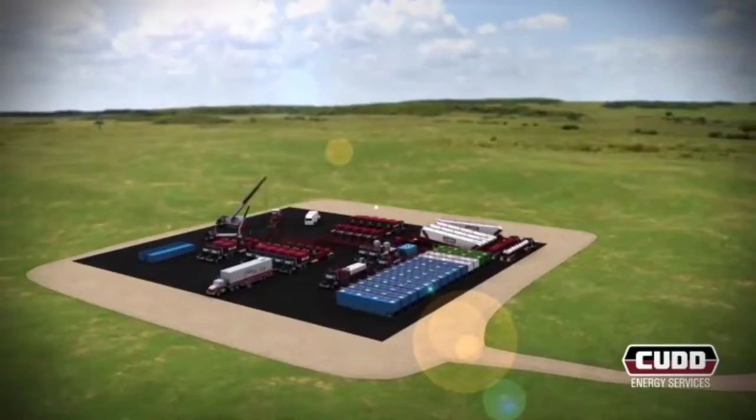Cudd Energy Services provides a broad range of specialized oil field completion services to energy companies engaged in the exploration and production of oil and natural gas. On today's well sites, we provide experienced personnel combined with engineered solutions to deliver an efficient completion solution.

Cudd Energy Services provides today's most modern equipment in order to prepare the well for the hydraulic fracturing process. Our fracturing equipment is engineered to the industry's highest standards with safety and reliability at the heart of the design. Our engineers evaluate existing well conditions to formulate an efficient and proven well plan for the customer.

Prior to any equipment arriving on location, Cudd's field representative performs a detailed site evaluation. Containment barriers and berms are constructed to preserve and protect the environment. This assessment ensures the safe and optimal setup of the water storage, proppant storage, coiled tubing, wireline, and pressure pumping equipment used for the completion process.

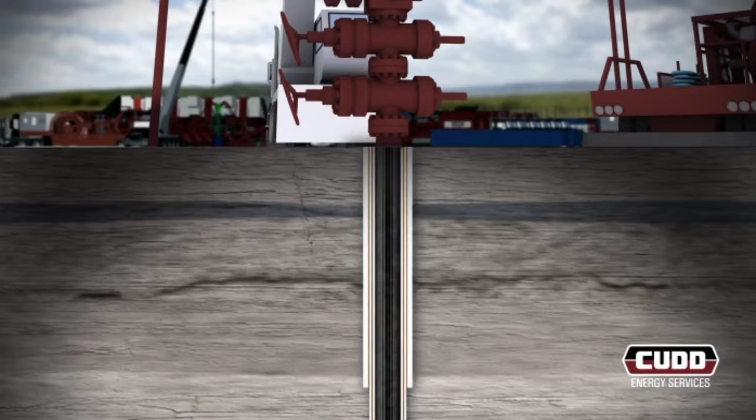After the well has been drilled, cased, and cemented, the completion phase begins. Hydraulic fracturing is an essential part of successful production in today's unconventional shale formations. This process will create a network of fractures in the zone of interest, providing channels for hydrocarbons to flow into the wellbore. The initial phase involves prepping the wellbore for perforation and stimulation of the toe stage.

Cudd's coiled tubing division utilizes through tubing solutions exclusive abrasive perforator, minimizing tortuosity and injection pressure during the hydraulic fracturing operation.

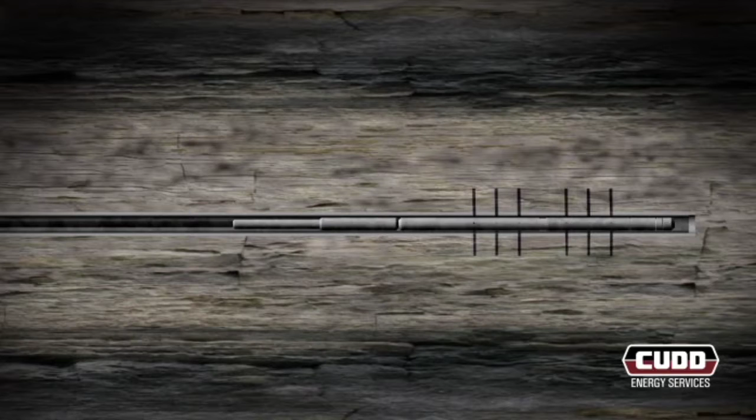The perforating bottom hole assembly is lowered by the coiled tubing to a predetermined depth. At this point, the interval is perforated utilizing a high-pressure water and sand mixture, creating communication between the production casing and the formation. After the initial perforation is complete, the coiled tubing and bottom hole assembly are pulled out of the wellbore, and now the toe stage is ready to be fractured.

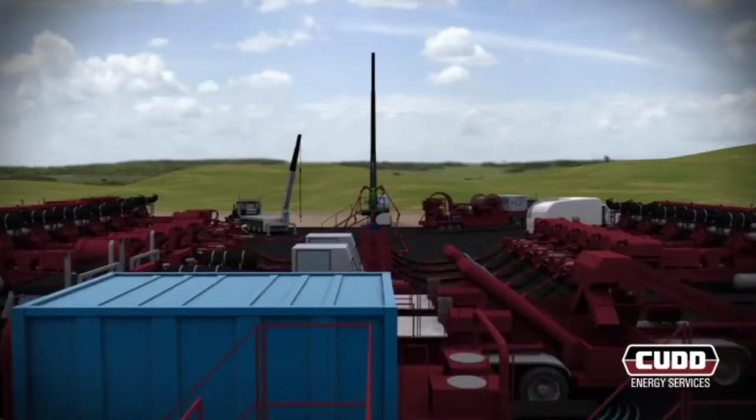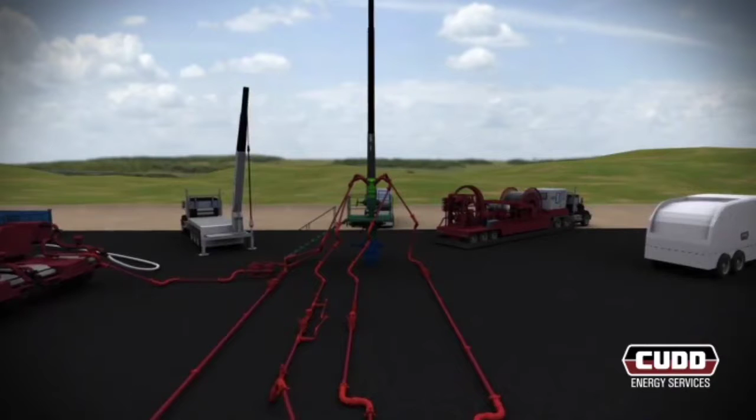The coiled tubing unit is then rigged down, and the hydraulic fracturing equipment and crew are positioned to begin operations. Cudd Energy Services' hydraulic fracturing fleet consists of the industry's most modern high-pressure pumps and computerized blending equipment. Our 2,250 horsepower hydraulic pumps are rated at 15,000 pounds per square inch.

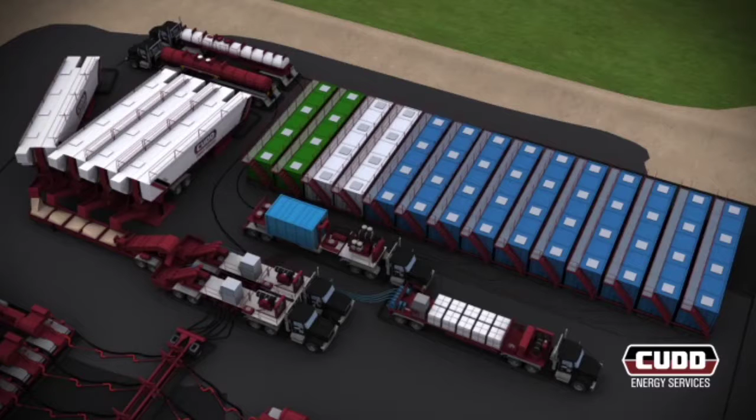Cudd's blender, hydration unit, and liquid additive system deliver a consistent fluid throughout a multi-stage pumping operation. Water is drawn from the storage tanks into the hydration unit, where it is mixed with the gel and sent to the blender. Simultaneously, proppant is transferred to the blender from the proppant storage on a dual belt conveyor, while the liquid additive system delivers precise amounts of chemicals to the blender.

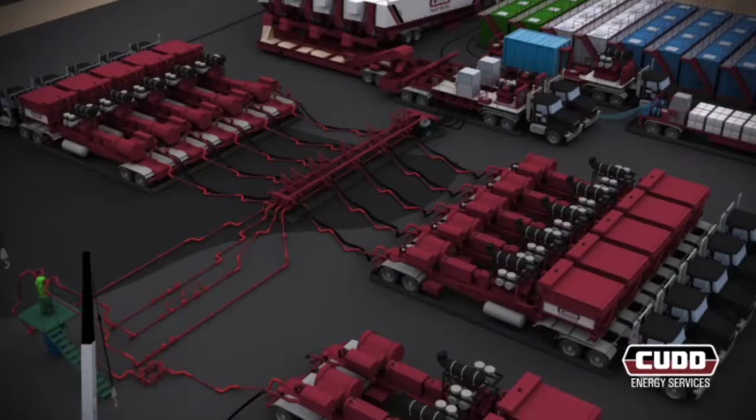The entire slurried fluid system is blended in the tub and sent to the high-pressure pumps through the low-pressure side of the manifold. The pumps increase the fluid pressure and then send it through the high-pressure side of the manifold to the wellhead. The entire fracturing process is supervised and controlled from the computerized data acquisition van.

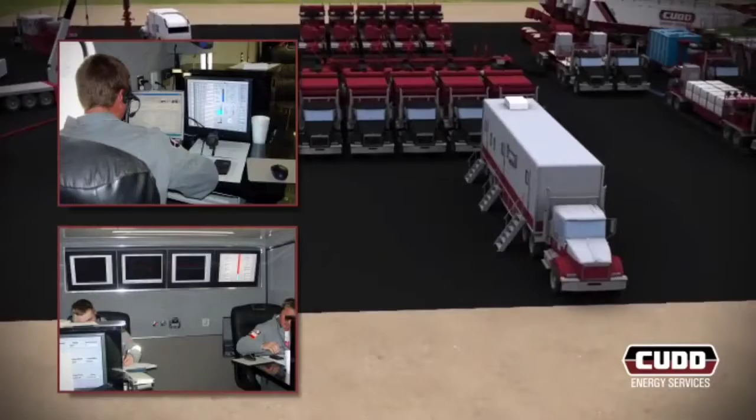Cudd engineers and supervisors observe reservoir behavior during the treatment using the industry's latest treating software. Personnel closely monitor the bottom hole treating pressure response and how it compares with the pre-job engineering design.

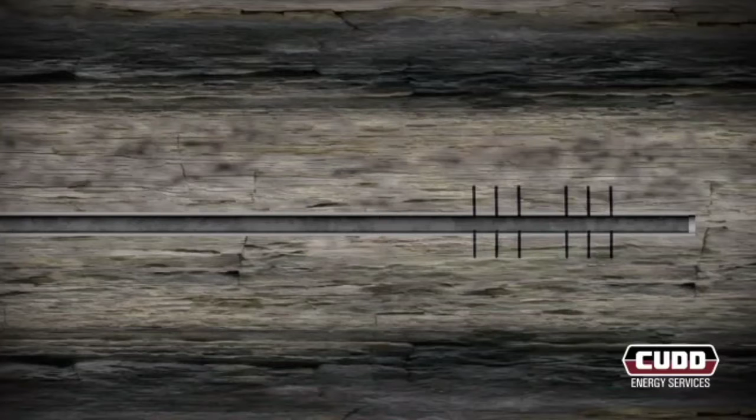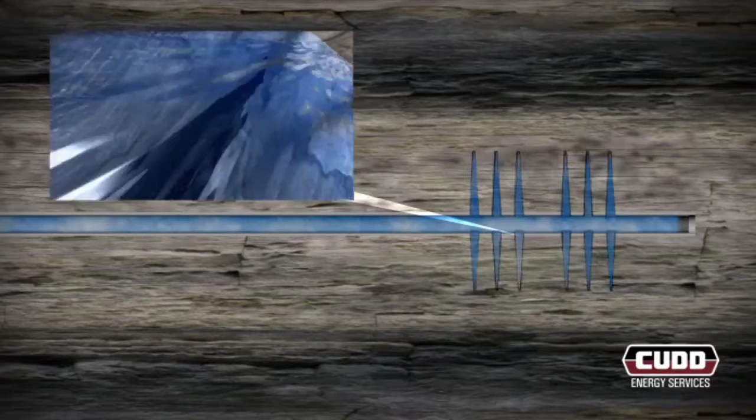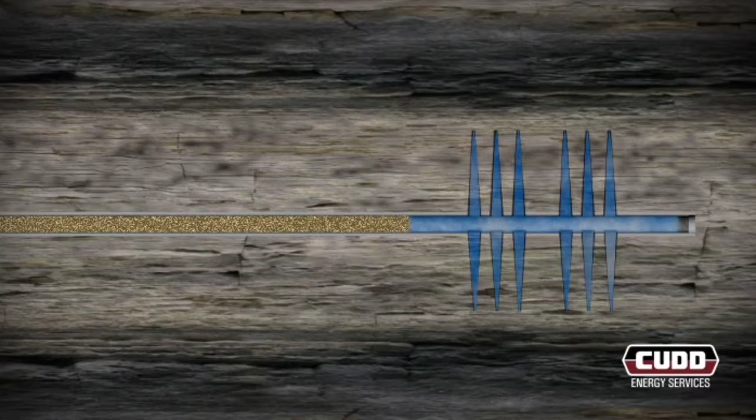The initial fluid, known as the pad, is void of any proppant and enters the formation through the perforations. This high-pressure fluid increases the perforation length and creates, elongates, and enlarges fractures along the natural channels of weakness in the formation. Then, proppant is added to the fluid and the slurry is pumped throughout the newly created fracture network.

The proppant holds the created fractures open and provides flow channels that allow hydrocarbons to flow into the production casing and then up to the surface. All fluid additives and proppant are closely monitored to ensure the volumes pumped are within design standards.

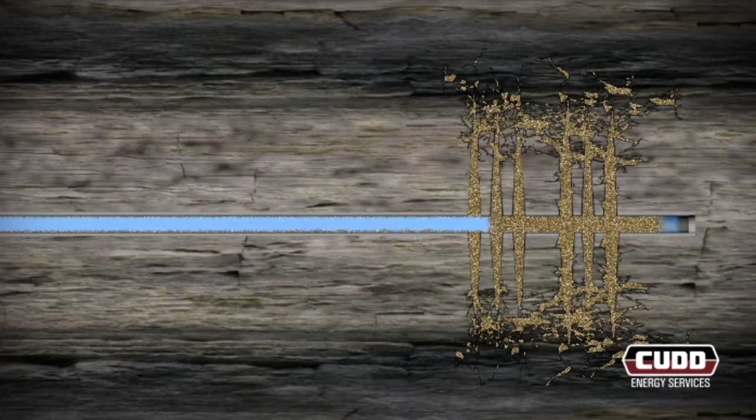Once the proppant slurry stage is completed, the well is then flushed with a predetermined volume of proppant-free fluid. This completes the fracturing process for the toe stage.

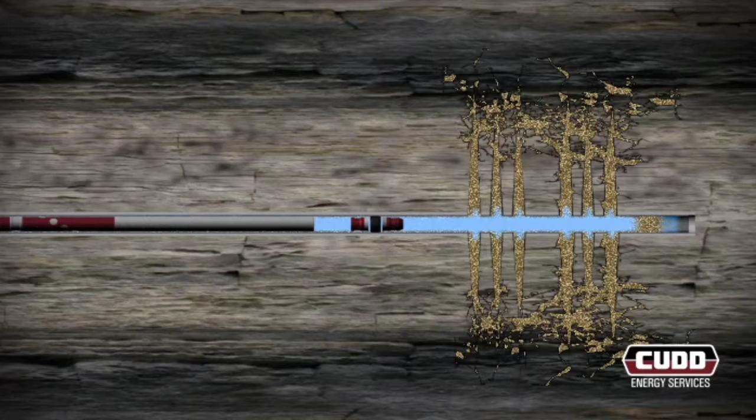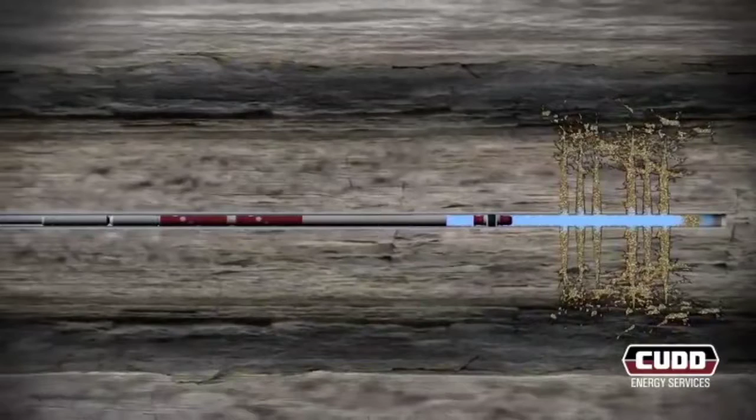Additional stages are completed by pumping down a perf-and-plug bottom hole assembly. This assembly consists of a composite isolation plug and perforating guns run on CES's electric line unit. The composite bridge plug is set in order to isolate the prior fractured interval and proceed with treatment of the next zone. This subsequent interval is then fractured, employing the same process as in the initial stage.

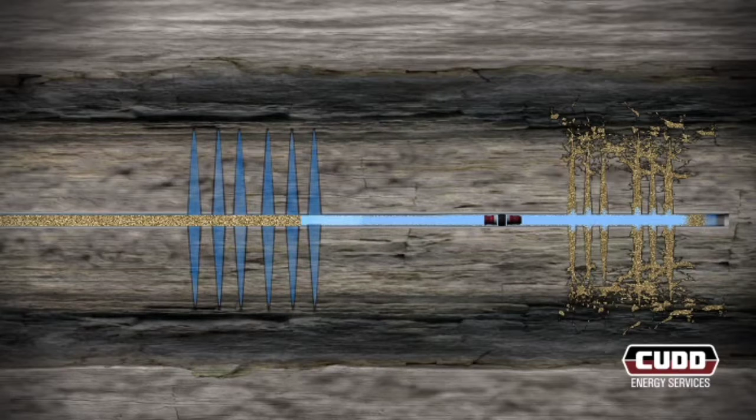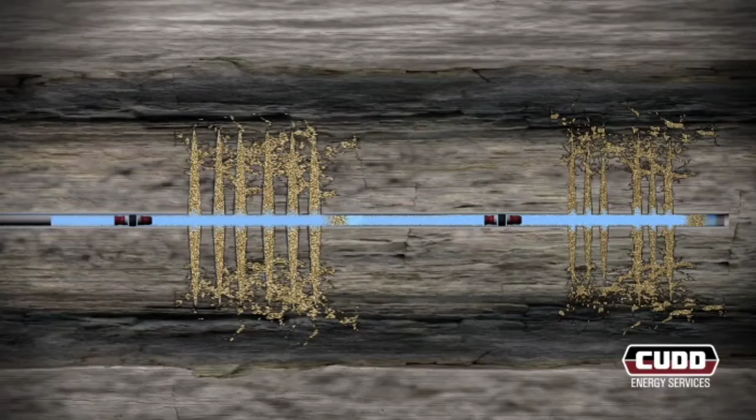The casing is perforated. The pad expands the network of fractures. Proppant is placed to hold the fractures open. The wellbore is flushed, and the new interval is isolated. This process is repeated for each interval until all stages are completed. Currently, typical horizontal shale completions consist of approximately 10 to 20 stages, with technological advances constantly increasing that number.

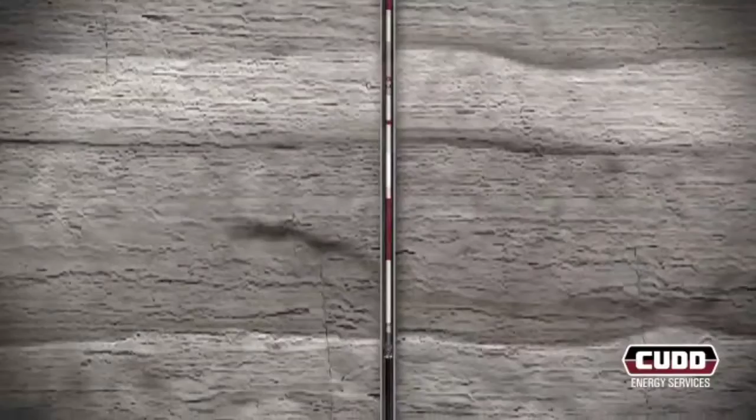Once the fracturing phase is completed, the isolation plugs are milled out and the wellbore is circulated clean, utilizing Cudd's coiled tubing or hydraulic workover services. The well is now ready to turn over to production.